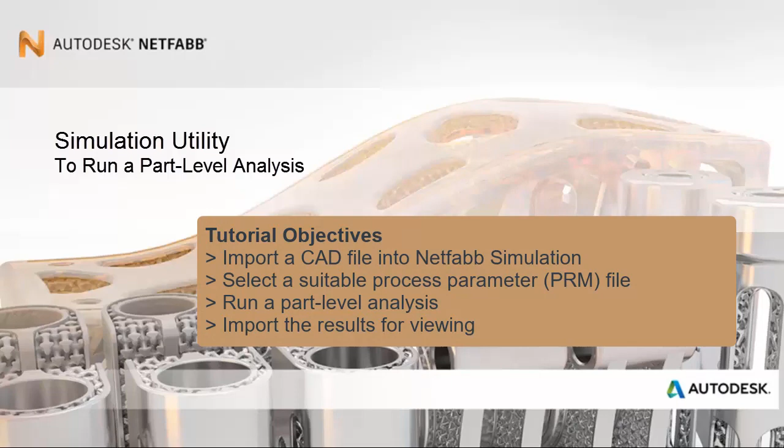Greetings, this is an Autodesk Netfabb tutorial explaining how to run a part level analysis. Now the objectives for this lesson are to import a CAD file into Netfabb simulation, select a suitable process parameter file for the geometry, run a part level analysis, and then import the results for viewing.

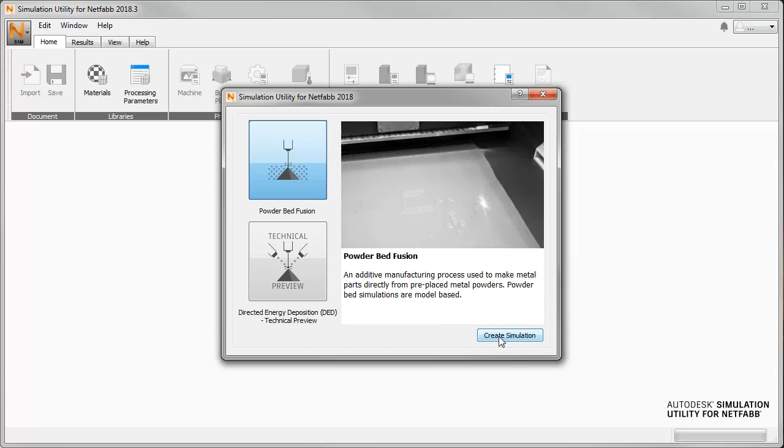In the simulation utility, we start by clicking the simulation menu in the upper left corner and selecting New. In the resulting dialog, we click Powder Bed Fusion to specify the type of analysis we're doing, and then click Create Simulation. We're prompted to import a file, so we navigate to its directory location, select the file, and click Open.

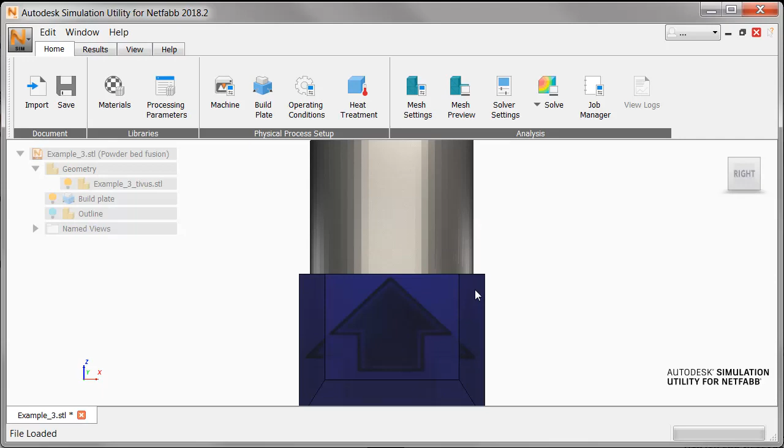In the Import dialog, we indicate that the file is a part, not a support structure. And in the Converted Model Units dialog, we check that the default settings are fine and click OK here too. The part opens on a build plate. Here we can hold down the right mouse button to rotate the part, or hold down the scroll wheel or middle mouse button to move the part. And also click the View cube for a more precise alignment.

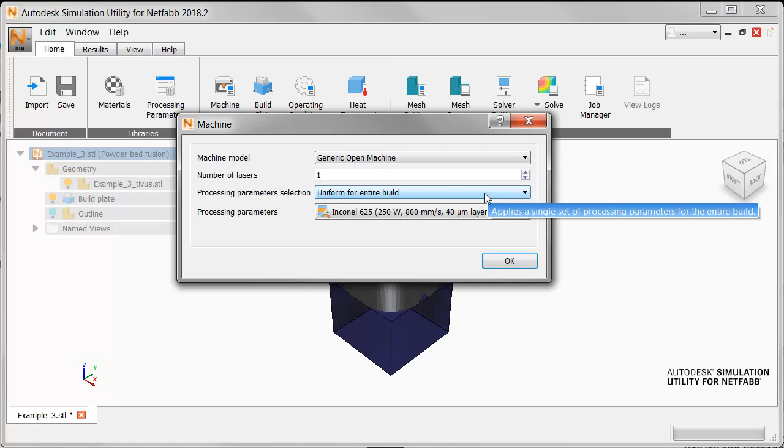On the Home tab of the top ribbon, we can set up and run the simulation. So we'll start by clicking Machine. We'll leave the default generic Open Machine selected, but note that it's also possible to select from a range of popular build machines. In the Processing Parameters field, you can use the PRM file that you created in the PRM tutorial, or choose another one for Inconel 718. Click OK to close that.

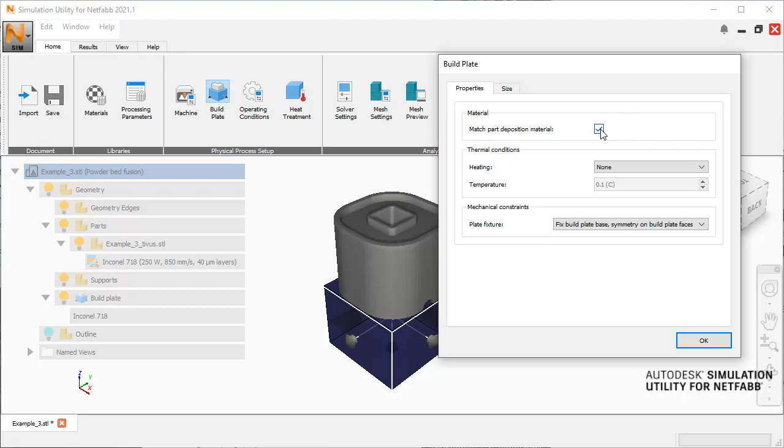And we go to the Build Plate icon. And on the Properties tab, we deselect the Match Part Deposition material. And instead, we select a material from the drop-down list. We're going to use SAE 304, which is a stainless steel. You see advanced options here that are covered in other tutorials, but for now we'll accept the default settings.

Then on the Size tab, what we can do is manually adjust the size of the build plate using the handles aligned with the X, Y, and Z axes. Or you may find it easier to enter numeric values in the length fields. Click OK when you're finished here.

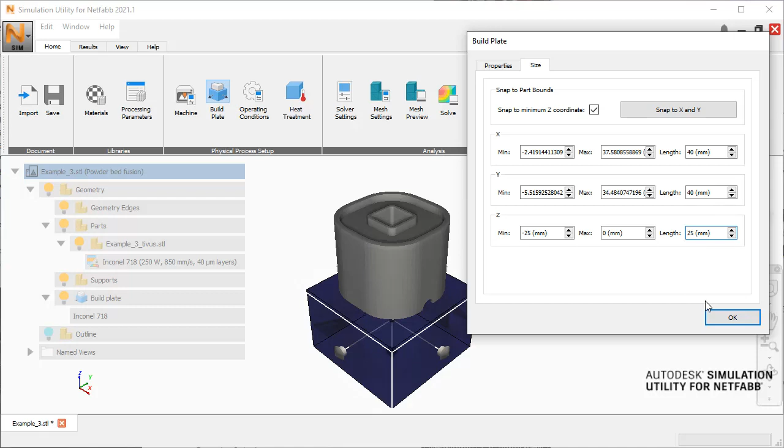So next we'll go to the operating conditions option, and we're just going to note the settings here. We will leave these default values as is. We're not going to simulate heat treatment or adjust the mesh settings, but we will click the mesh preview to generate a mesh with default settings.

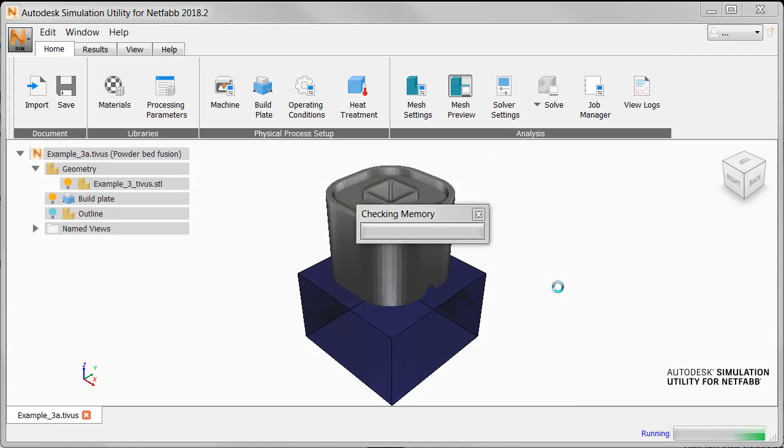Now we're immediately asked to save the model in a project, and in the top of this dialog, the proposed save location is the same place where we got the part from, so we're going to save it in a different directory of saved objects. Once that's set, the mesh generates, and in a few seconds we'll be able to see the results.

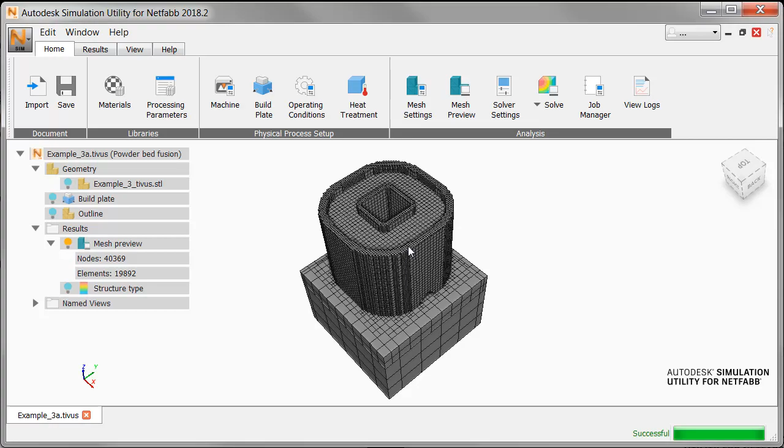So the system has consulted the PRM file and generated a proposed voxel mesh on that basis. Note that the element size in the mesh varies with the need for detail. Small voxels where the part has fine details such as curves and edges, but larger voxels in flat areas, and especially in the build plate, away from contact with the part.

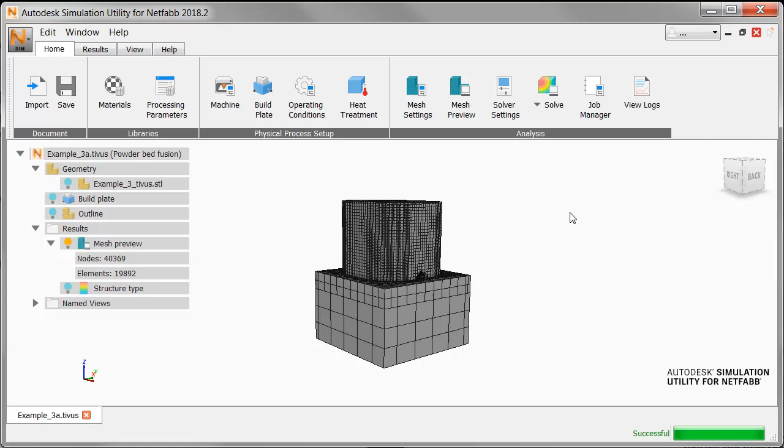Seeing this mesh gives us an opportunity to look for any mesh errors that could affect the simulation, and no errors are visible here. So we open the solver settings. On the Analysis tab, accept the default settings to run both a thermal and mechanical analysis. Hit OK to finish setting up the solver. In the ribbon, click Solve to run the simulation, which first runs a thermal analysis, recording the temperature at every mesh node for each timestamp.

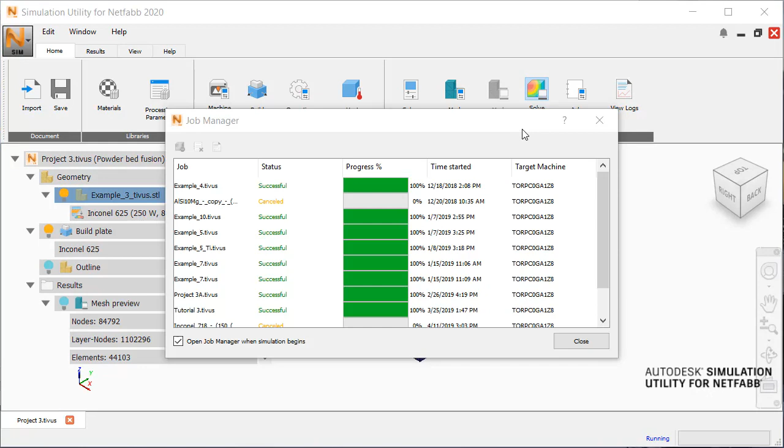Then the thermal analysis results are used as input for the mechanical analysis that will determine the resulting displacement, stress, and strain. While the analysis runs, we can use the Job Manager to monitor progress. In the upper left of this dialog, we can click View Logs to review thermal and mechanical results for each timestamp. During the analysis, the logs are scrolling, so it's not easy to consult them until after the simulation run.

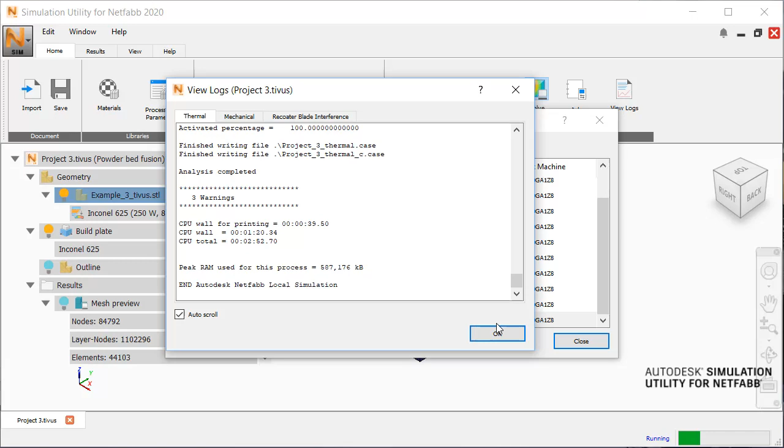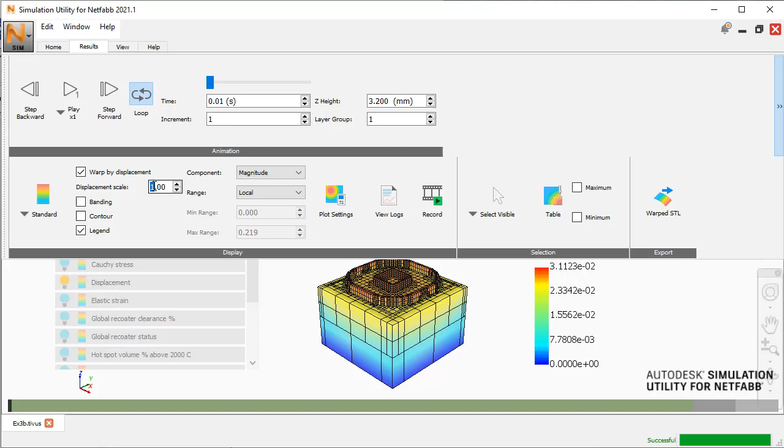When the analysis finishes, the results are loaded. In the browser on the left, check that the light bulb is on for displacement results. And then in the ribbon Display panel, click Warp by Displacement and set the displacement scale to 5 to exaggerate any distortion, making it more visible. Now we can click the play button in the upper left to see the displacement results. To stop the visualization at any time, just click play again.

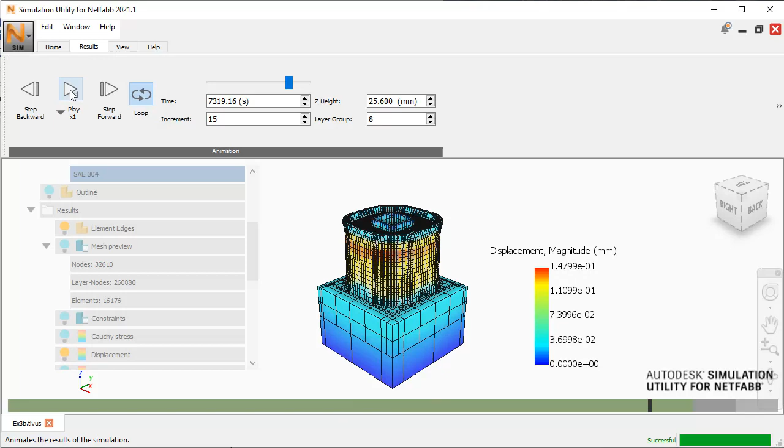So that is the completion of our basic simulation workflow. Just to summarize the process, we imported a geometry into Netfabb simulation. We selected a PRM file to perform a part level analysis, and then we viewed the displacement results.